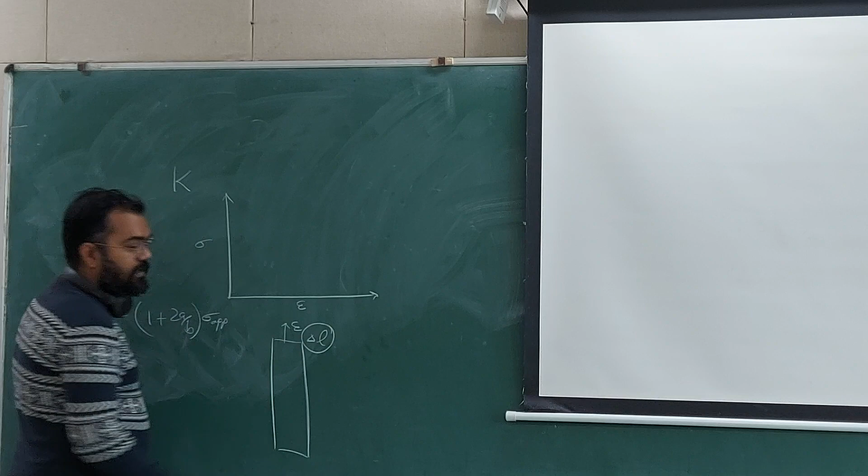I am only applying strain and I am not applying stress. Can I do that? ऐसा कोई strain apply कर सकते हैं जिसमें stress apply ही नहीं करना पड़े? हाँ? कर सकते हैं. How will you apply strain? I have a piece of object and then I'm saying that I'm applying strain and not stress. So that means I'm creating some amount of delta L. In order to do that, I need some force, no?

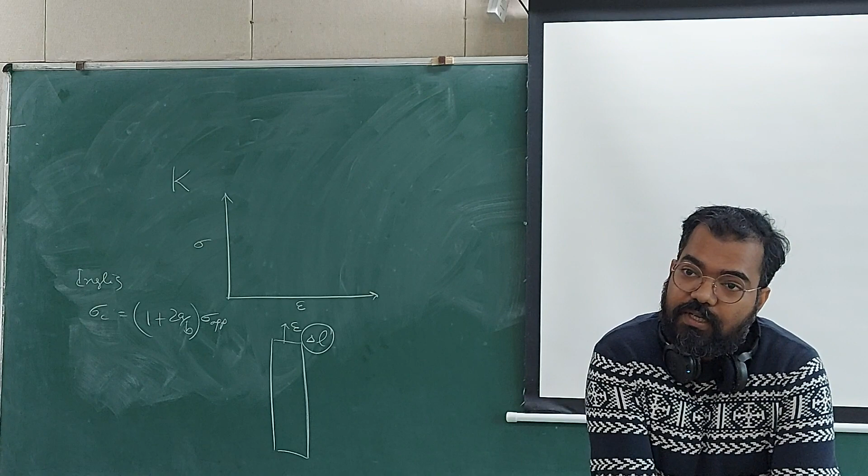So molecules will expand, but they will not. Molecules will expand. मतलब कौन सा molecule? Spacing. Intermolecular spacing. Yes sir. Talk in terms of metallic materials, if you can. ठीक है, polymer में ऐसा हो सकता है. Polymer में बहुत कुछ हो सकता है. Metallic materials में, what is the molecule? In steel, what molecule you have? Which molecule do you have in steel? Grains. Grains are molecules.

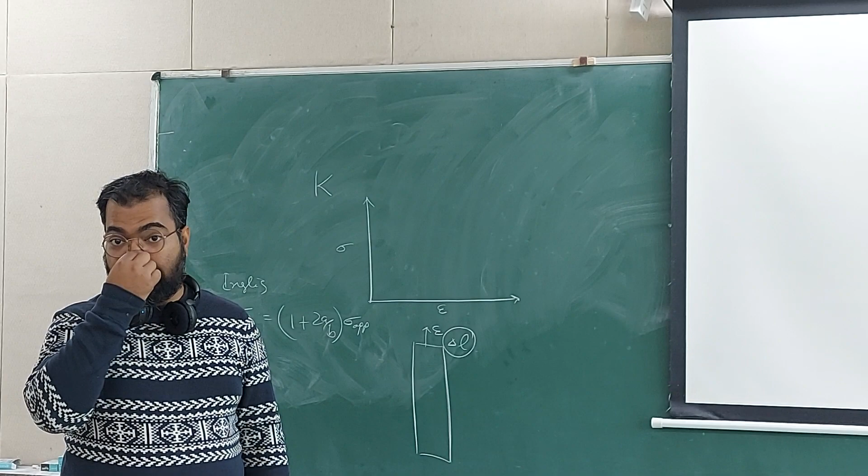Clear, na? There are other arguments. For moving dislocation, you need stress. Peierls-Nabarro stress is needed. You have no stress, so it can't move. So when you think that I'm applying strain, we don't call it strain applied or stress applied test. We call it displacement controlled or force controlled tests. There are two types of tests which you can do. One is displacement controlled and another is force controlled.

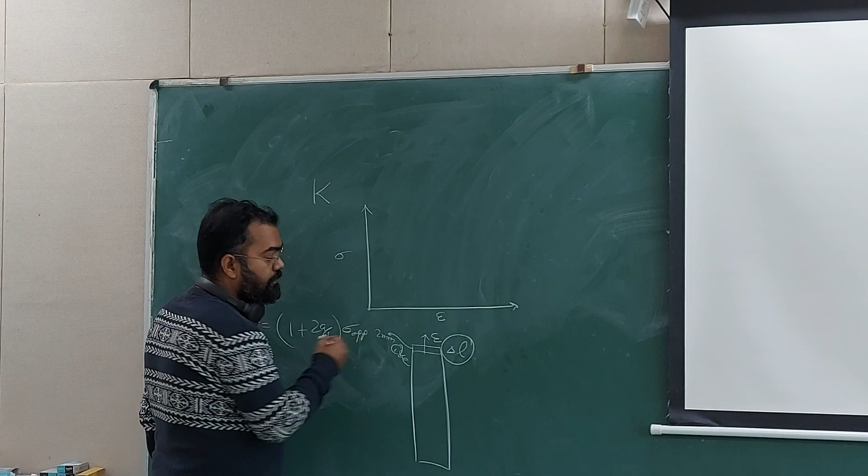You can't just apply displacement without application of force and vice versa. Thermal is one example, but there is nothing happening there. So displacement controlled means you control that within a second you are only going to stretch 2 millimeters. When you are doing force control, you say I will apply 20 megapascal in 1 second. You can't stop strain there, or stress in the other scenario. So we have come back to the very basics.

If this is understood, then in a tensile test we get this kind of curve. We don't really get this; we get force and displacement, convert that to stress and strain. Why are we doing this? After 10 lectures I'm asking, why do we do a tensile test? Young's modulus के लिए tensile test नहीं करता है. So let us talk about this. Now it is becoming a tutorial session. You should do a tensile test. Have you done it? You must do.

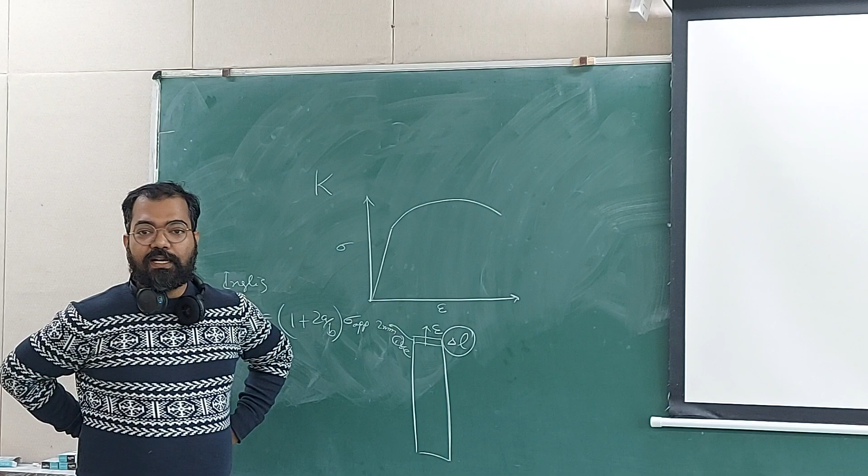Haan, so you watched it, no? Or did you do it? So you put it in the machine and started the machine and you just watched it, witnessed it. So you should do it again. Hopefully our UTM will work by the end of this month. If that happens, then we should do it. Okay.

So whatever test we do, conventional tests for which standards have been made. Okay, so experiment and test, these are two different things. The word experiment can be used in English literature also. Like, why are you experimenting with this? If I give you a sophisticated thing and you are just tinkering with it, then I might tell you, why are you experimenting with this? What does that mean? You're not really doing any standard test.

Experimentation means you are trying something out. Results are not definite. Results are also not defined. You are also not sure of the method which you want to apply. You might have some idea what you want to measure or what you want to see. Sometimes you might not have. For example, you just take a piece of metal and look at it under a transmission electron microscope. You really have no idea what you want to do. You are just looking at it. So you are experimenting with it, playing with it, tinkering with it.

Right? So when Schrödinger designed an experiment to prove whether quantum really exists or not, that example of Schrödinger's cat, which is dead or alive inside a box, that is an example of experimentation. Experiment also to disprove whether ether exists in the universe. There was an idea that there is a fluid in the universe and all the planets and celestial bodies are floating in it, and that fluid was ether. So somebody said there is no ether, there is nothing there.

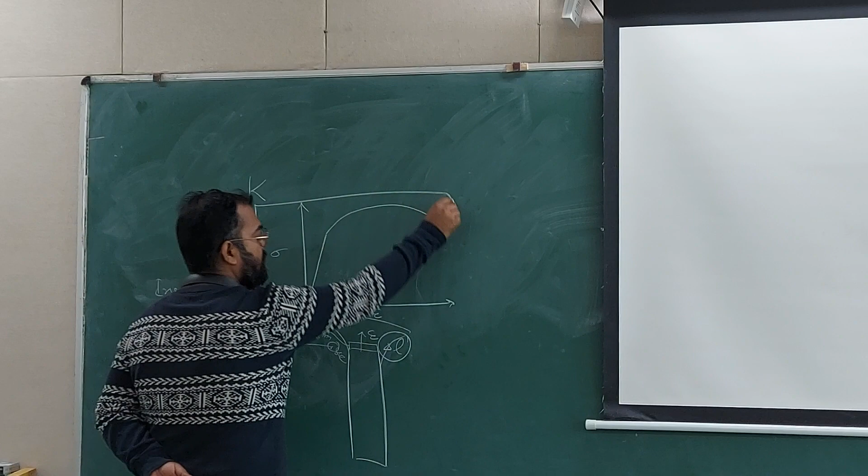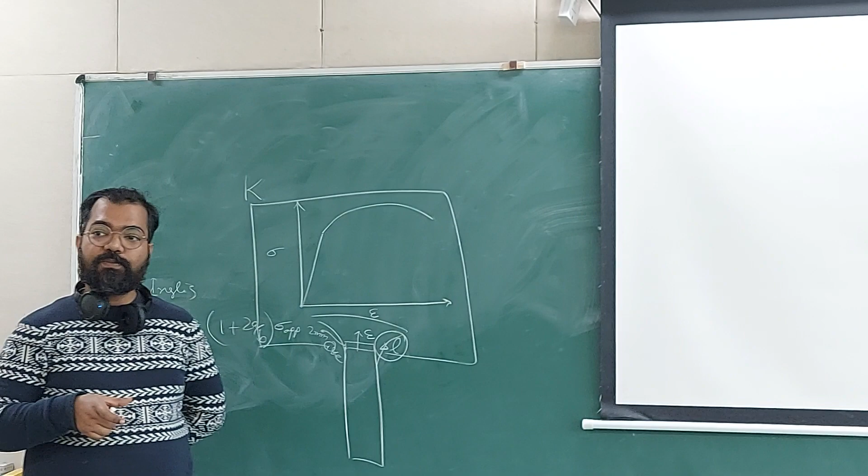If you don't use an extensometer, you are getting the displacement from the machine; force anyways you will be getting from the load cell only. But displacement you can measure from the actuator of the machine. So there is a grip, and that grip is being pulled by the UTM machine, and the UTM knows how much its frame is moving. That is called crosshead speed, and from crosshead speed into time you get the displacement, and that displacement is given to you by the machine.

So if you use that displacement to calculate strain, you will not get the Young's modulus correctly. Why? Because the upper portion will also deform, and the machine will give the reading along with the whole specimen. But we are taking the reading of only the gauge length, so we need to provide an extensometer. So the total strain which you are getting is the strain in the specimen and the strain in the grips and fixtures.

The UTM overall fixture really doesn't matter that much; the grips matter, because the dimensions of the grips are smaller in comparison to the machine. So if you are applying 200 megapascals, that same amount of force, not stress, is also applied on the fixtures, right? Fixtures are also under the tension load. And why do we have this dumbbell shape of tensile specimen?

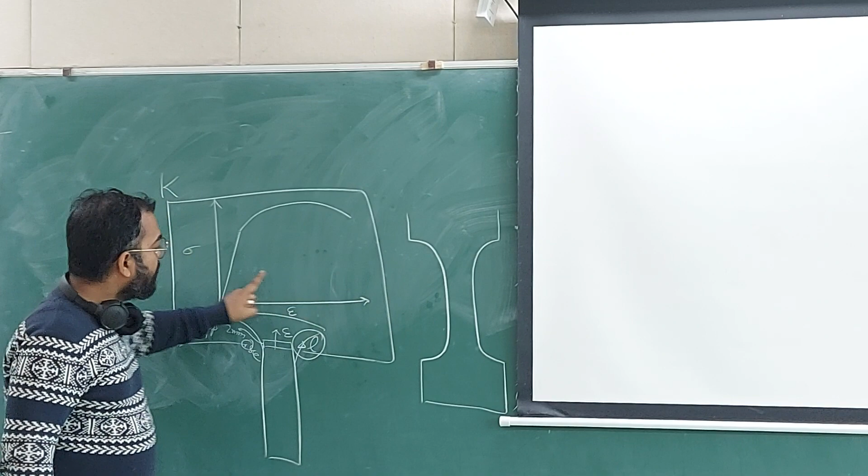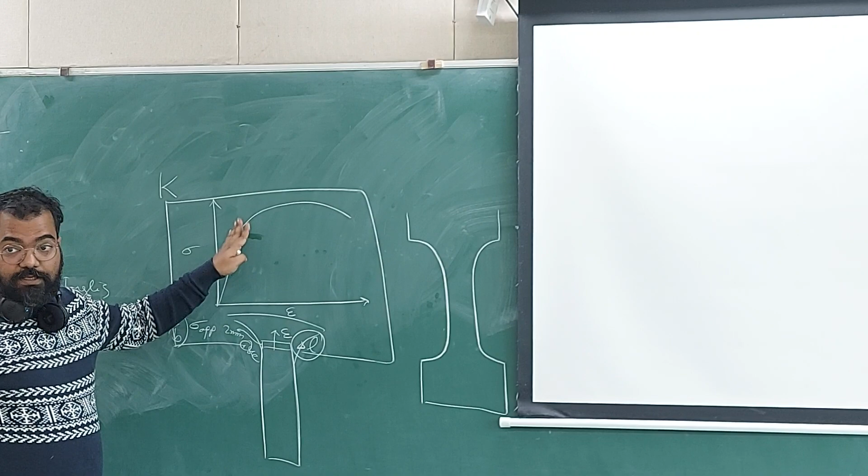Because the diameter of the sample is smallest in the whole assembly, the stresses will always be higher, so they will always be ahead in their stress-strain diagram. The elastic region will come earlier in them, plasticity will begin earlier, damage will begin earlier, and they will fail earlier than adapters and other things. If your adapter has a stress-strain equal to this, that should be the worst condition. You can have a worse condition, that you have even softer adapters with a stress-strain profile something like this.

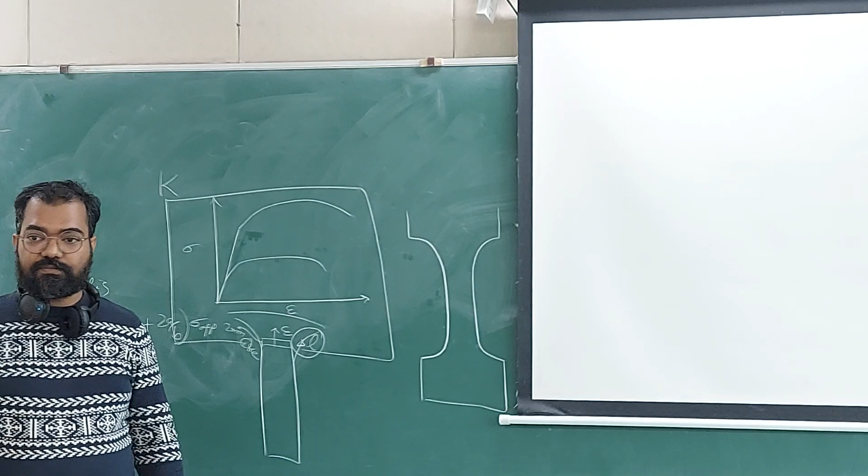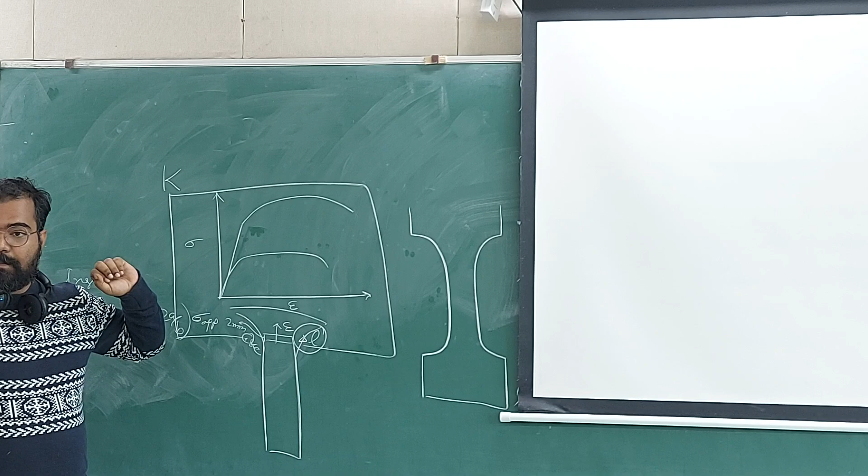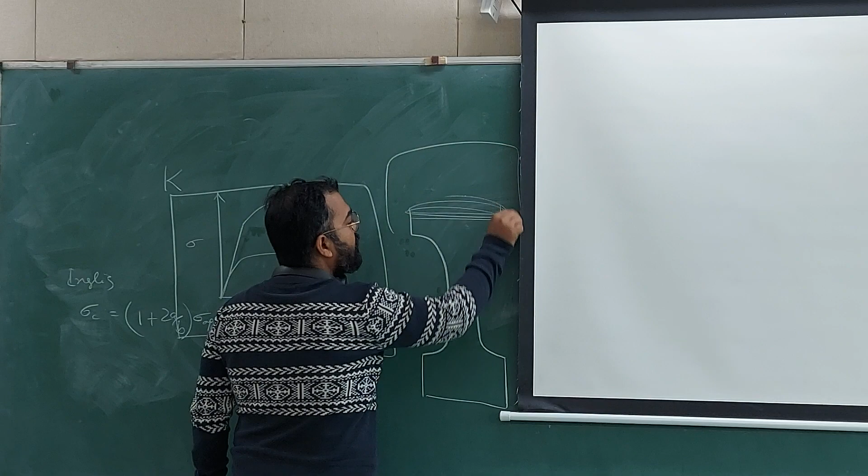So the worst condition could be that you are making an adapter of the same material as the tensile specimen. Even then, the sample will break first and the fixture will not break first, because this part goes into the fixture, and the fixture's diameter is going to be larger than this, so the stresses are going to be less in the adapter, in the fixture.

But all of them will be elastically deforming. Once it breaks, they will recover, so fixtures are good to go for the next time also. But during the test they have deformed elastically, right? So the strain which you are getting from the machine also includes the strain coming from the elastic deformation in the grips and fixtures.

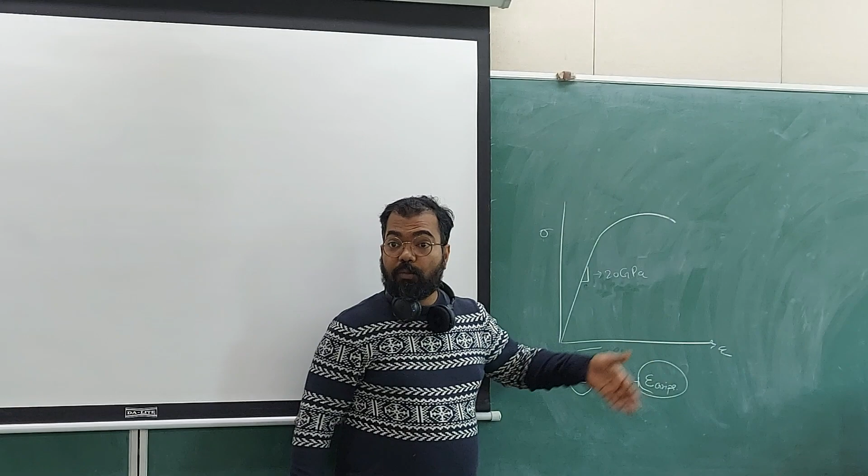That's why it is wrong. Because you have larger strain in comparison to what you should have, the material deformation is showing more strain than it should. So the material looks a little softer on the curve, not really it is, because you are getting this extra strain from the machine. So your Young's modulus will go down, your slope will go down. This is called machine compliance. You should read about this.

And how do you remove the effect of machine compliance? If you use an extensometer, an extensometer is an instrument which sticks to the sample, and you should remove it as soon as the curve changes its slope. As soon as you are in the plastic region, you should remove it for the safety of the instrument, because then necking will happen. After some time, necking will happen. You don't know how much time it will take for necking, so you should remove the extensometer.

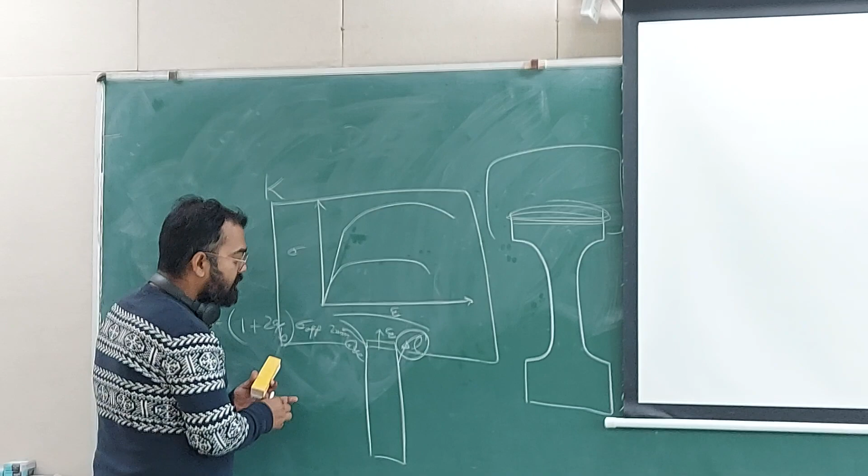And the extensometer is valid only for the elastic region, because once it deforms locally, you have necking, then the extensometer might not be in that area, so you will be measuring the strain somewhere else. As long as the strain is uniform everywhere, which is in the elastic region, the extensometer is just measuring how much change in diameter is happening.

Okay, so if the diameter is going down, then the two tentacles of the extensometer will come closer. This will give a change in the resistance, and the change in resistance will be calculated via a Wheatstone bridge, where you have an unknown resistance and 3 known resistances. That signal will be converted back to strain, which you will be getting in your machine.

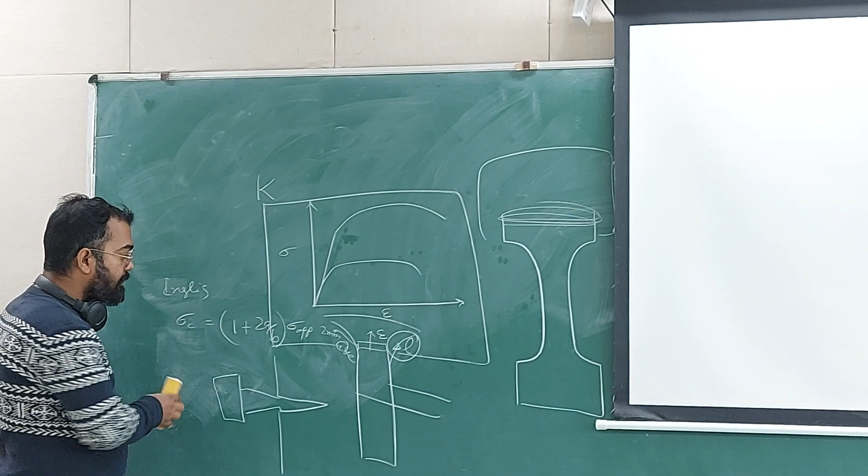So coming back to the same question, tensile test we do to measure yield strength and all those things. Okay, so now let me ask another question. Why are we interested in finding out yield strength? Why do we want to know what is the yield strength of a material? To avoid material failures.

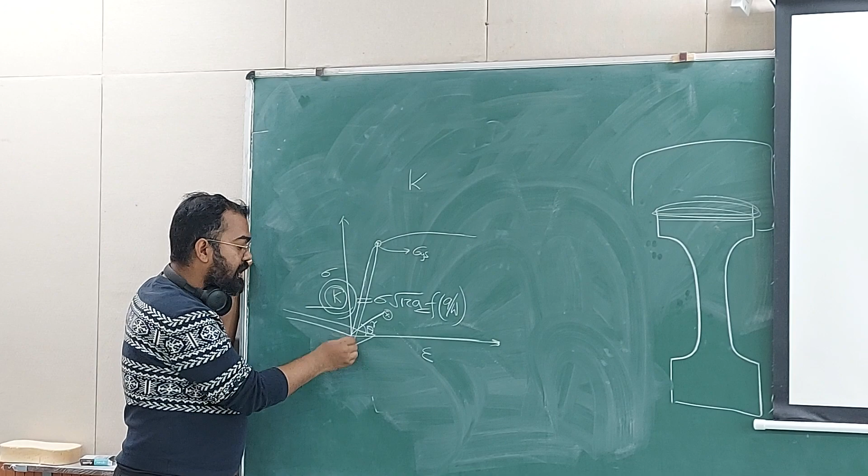Is it okay? So when you increase stress, then K is also going to increase. A can also increase. With increase in stress, crack can start propagating, right? And that will be compensated in stress intensity factor. Of course, you will have f of A by W, but once you know A, then the K will also be known, right? So after a point of critical K, if you begin with a crack length of A, you are now loading, and again in this kind of testing you get force versus displacement. Okay, and from this force versus displacement you have to calculate the value of stress intensity factor.

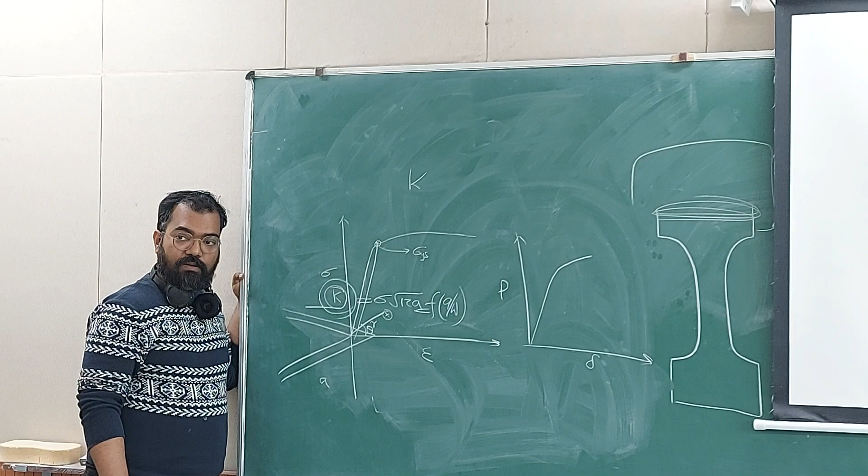Okay, so with this increment you can also plot K, which is increasing with delta, and beyond a value of K, crack starts propagating. If you are having a stress condition or crack condition so that the K is smaller than that critical value, then crack will not propagate in that material. Okay, so if I take a AISI 4340 steel, mild steel, titanium alloy, for each of them this critical value is going to be different. If you cross this value, crack will propagate and you can't stop it. And if you are lower than this value, crack will not propagate. Okay, so this can help in design criteria.

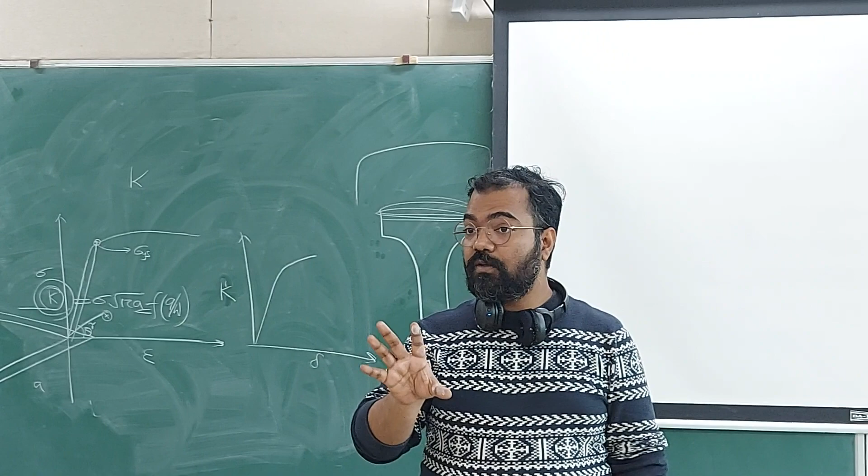How? So from manufacturing, if you make a component, we know by doing ultrasonic testing what is the maximum size of the defect I have, right? What are the cracks which have been created during the manufacturing process, for example, because of shrinking in ingot casting. Okay, so I know the worst condition, that this is the maximum size of crack I have. For that I can calculate what will be the stress intensity factor for worst condition. And what is the worst condition?

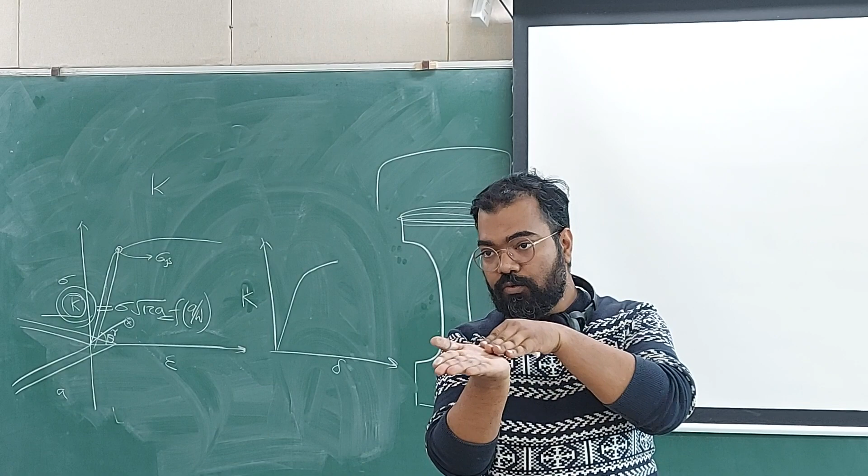Mode 1. Mode 1 will give you highest value of stress intensity for the same amount of stress if you load a specimen in mode 1, in mode 2 or in mode 3. If you apply same amount of stress, K will be maximum in mode 1. Okay, so if you are good for worst case, then obviously you are good for the other better cases, right? So this is why you do testing in mode 1 unless you are really interested to understand what is happening in different modes. Just for design sake, people do mode 1 fracture toughness testing.

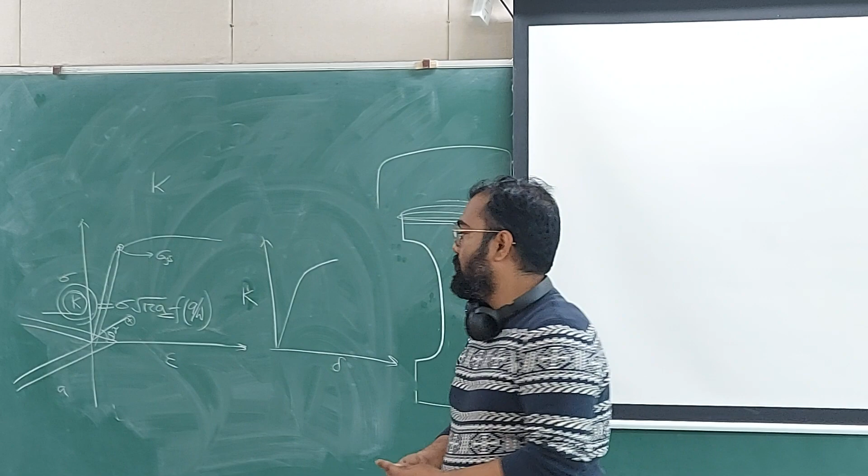Okay? So when you do mode 1 testing, you are slowly increasing the value of stresses, and thereby you are increasing the value of stress intensity factor for the known amount of crack. Or you can know from the test that for, let's say, titanium alloy, some alloy, you are getting a critical value Kc, or K1c I will call it, because I am doing the test in mode 1. If I just write Kc, I do not know in which mode the test was done. Okay, so this is written in Roman because all these studies started from, not from Rome, from physicists.

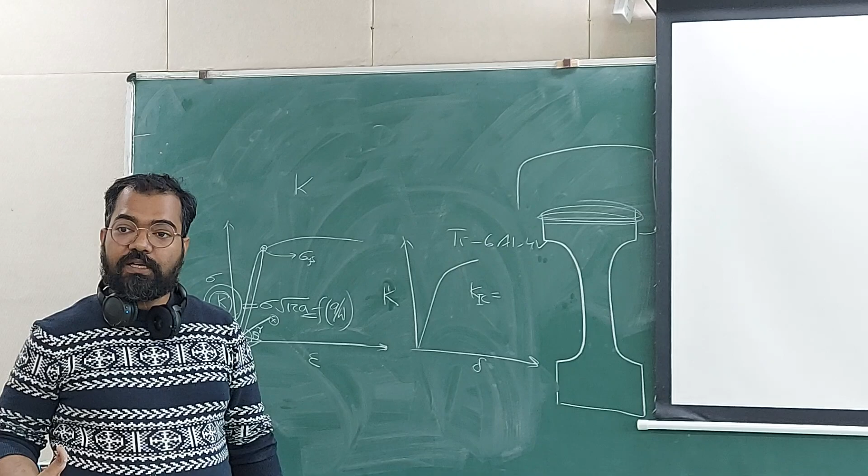Okay, and you will see the earlier studies, they use a lot of temperature. So when they use temperature in calculation, you will see the unit to be Kelvin. So physicists, their favorite unit is Kelvin for temperature. But then when fracture mechanics came to engineers, then it changed to degrees Celsius, and this unit conversion usually goes on. I don't know how politically influenced this is, but it changes once in a blue moon.

So why was I discussing units? Temperature. Fracture toughness. Fracture? Kelvin. Okay, so I have forgotten.

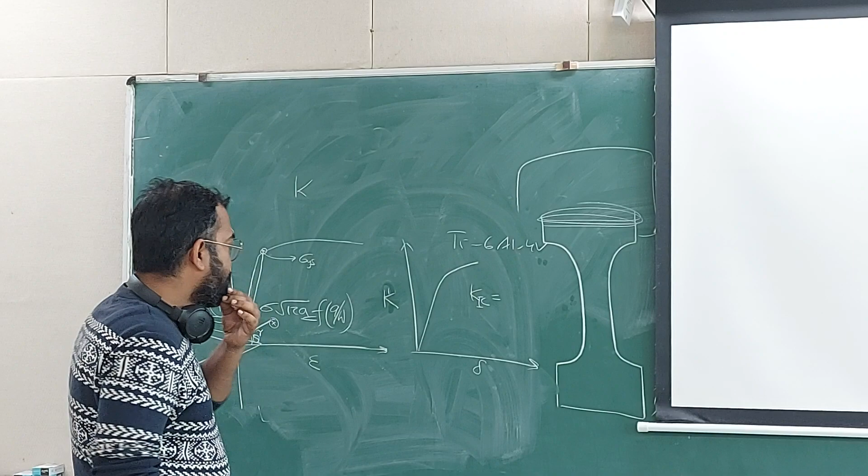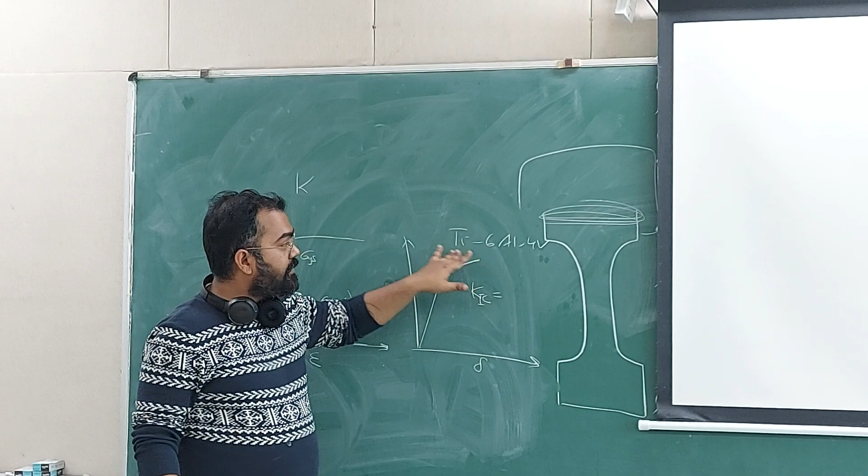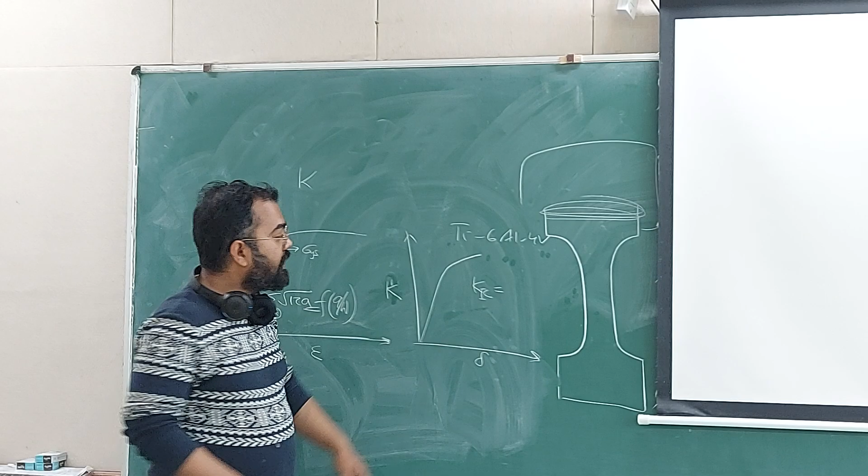K1c. So mode 1 is the worst condition, and in that condition, for a crack length, if you are doing this for this alloy, you do the testing and you can find out when the crack started propagating, and that value is K1c. Okay, so if I have K1c, somebody has done the test and told me that this is the value of K1c. So let us say 180 MPa root meter. Okay, MPa root meter is the unit of K1c.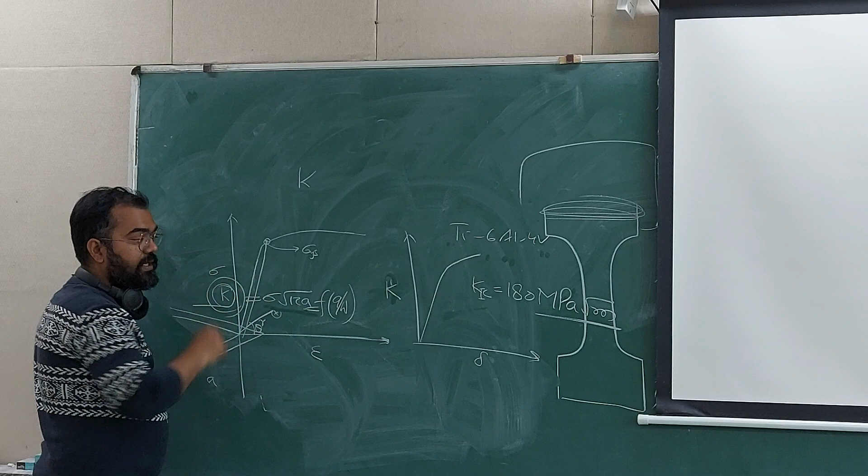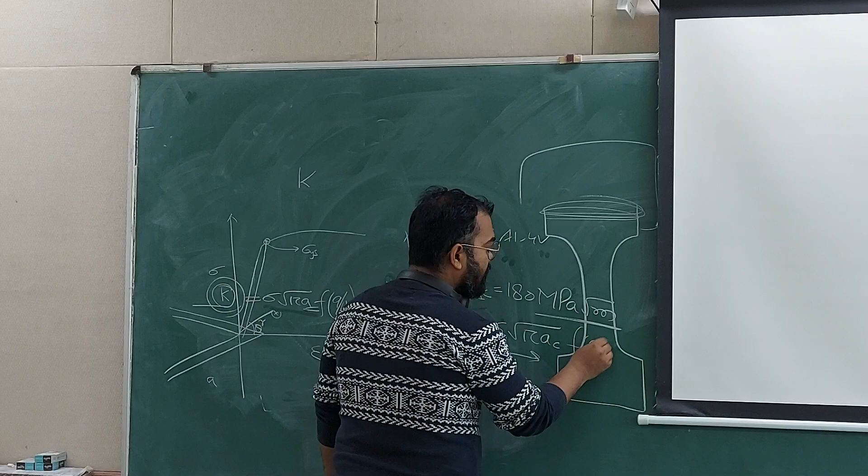Okay, so if this is the value of K1c, I can find out how large of a crack I can accommodate in my component. So from this I know that this must be equal to sigma root over pi AC. That's the value of critical crack I can have in my system. And if I have a pressure vessel which is internally loaded by pressure, then if I take a small element on the outer radius of the material, and suppose I have a crack like this, I can imagine that this is going to expand, this is going to bend because of pressure, a small element of that.

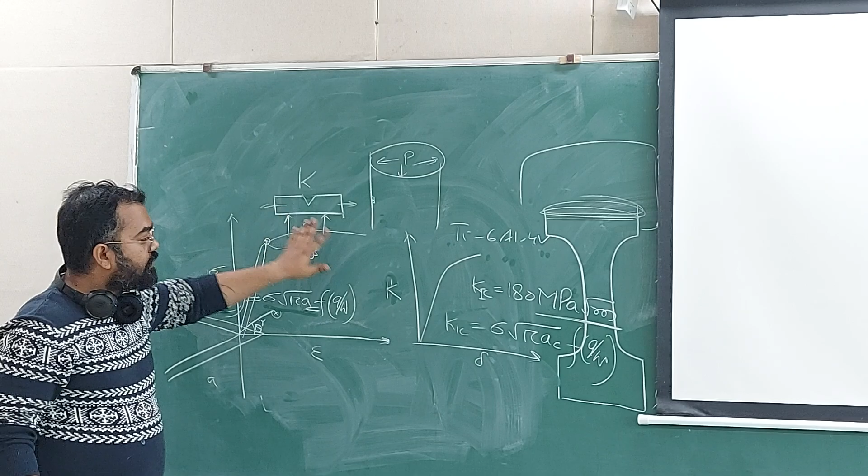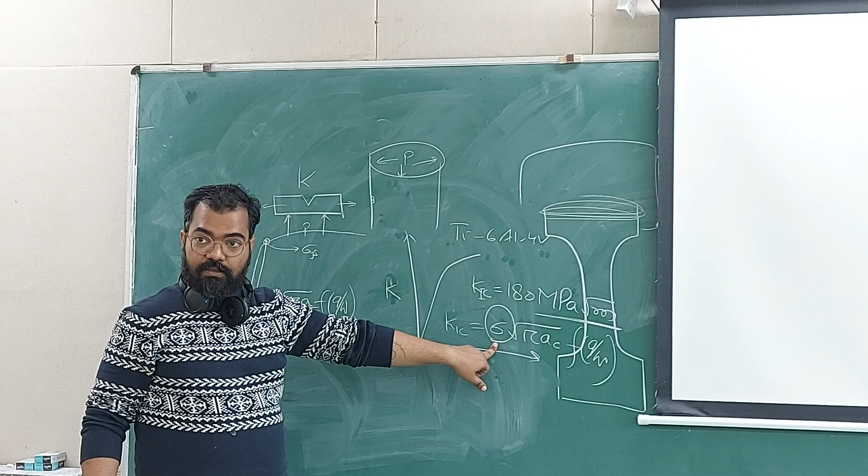Okay, so this is going to be in mode 1. Even if it is not, the crack can be a little tilted, but the worst condition will be mode 1, right? So that takes care of the factor of safety there. So from this I can calculate; f of a by w I know for mode 1. And then I should know how much hoop stress is there in that pressure vessel. From that I know my operational stress condition. So I plug that factor there, I know this value, I know that value, pi everyone knows, so I can calculate AC. And suppose AC comes out to be 5 millimeter.

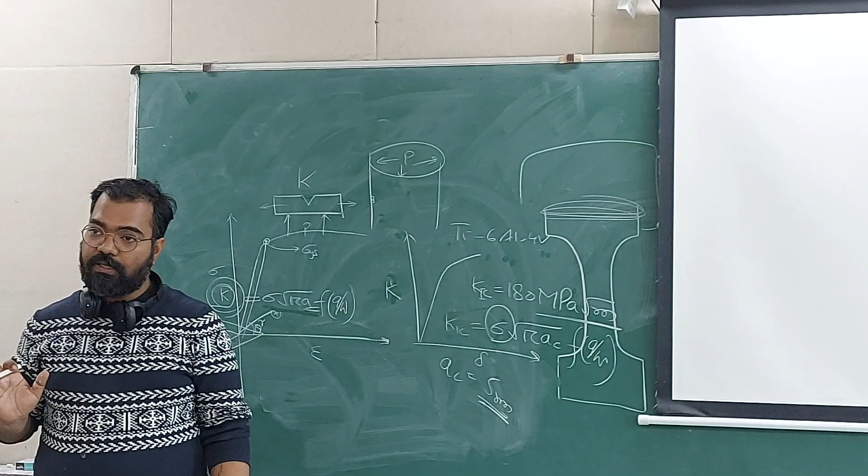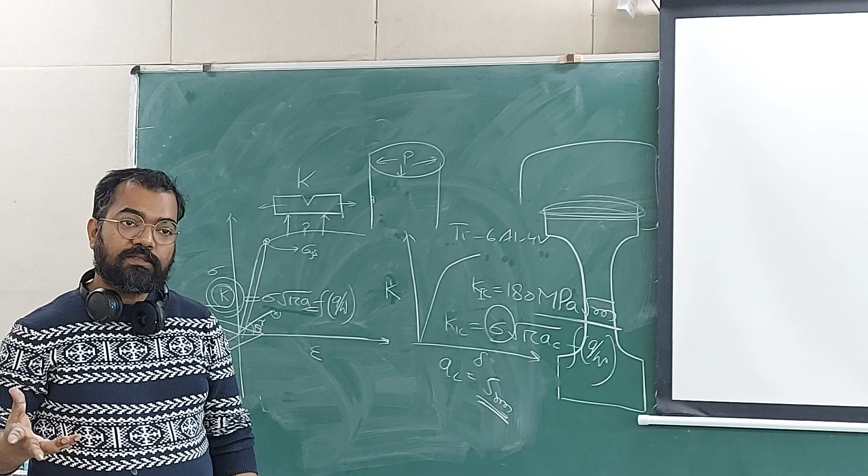So then I know that no crack in my system should be larger than 5 millimeter. And then I do ultrasonic and see that the maximum crack I am getting is 3 millimeter. Then I will take that plate or sheet or whatever it is, and if it is 6 millimeter, 5.5 millimeter, I will not take it. I will reject. Understood the importance of K1c? Yeah. So this K1c appears to be a material property, at least a design criterion for sure. But there is a size effect. And before we go into that size effect, well, now we are talking about it, so I'll finish it.

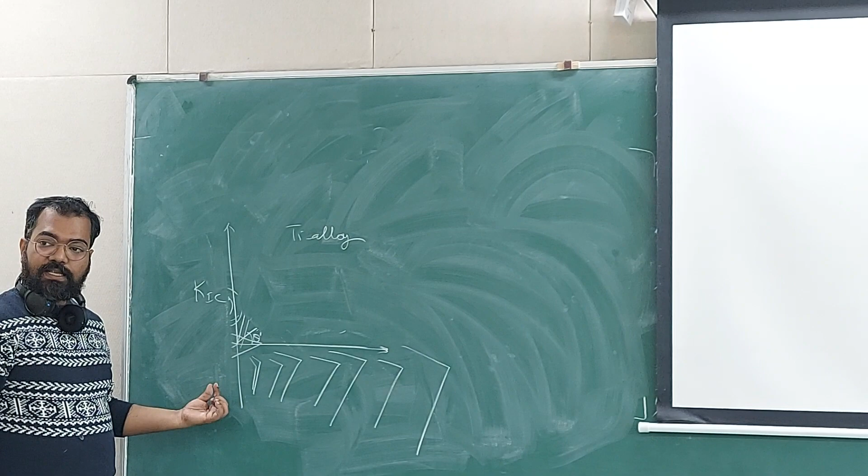So if you calculate K1c for the same alloy, let us take titanium alloy, and I do the testing for a very thin sample, and I keep on increasing the thickness of the sample, from a very thin sample to a very thick sample. So what am I changing? Plane stress to plane strain. And if I plot it, then the initial region is unknown, and then it shows this kind of profile. It is not K, it is K1c. So for different thickness values, you have done the fracture toughness testing and found the critical K value for which the crack starts propagating. That value you are plotting. Do you understand? No?

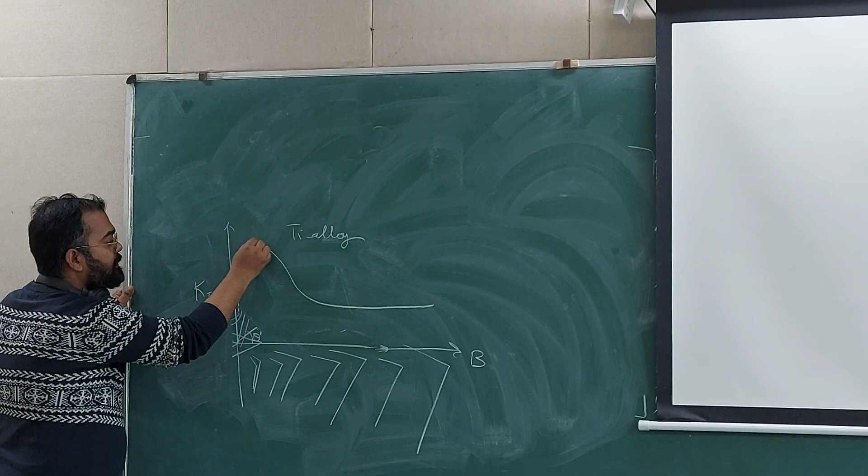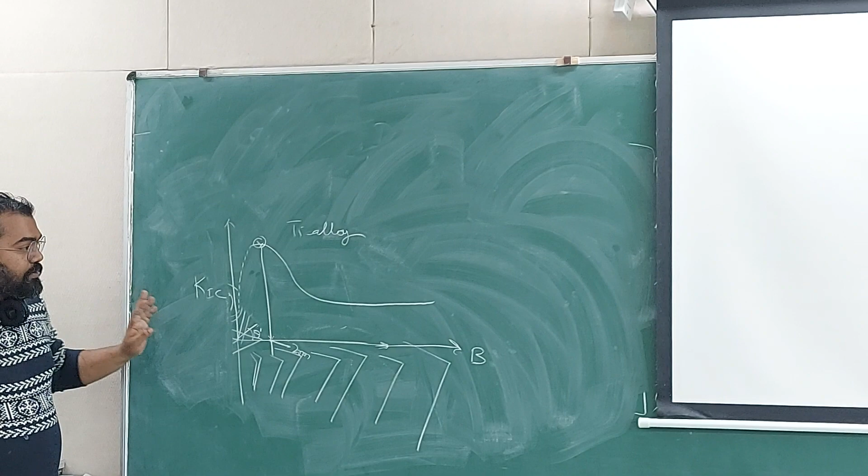So let us take this point. This point would mean 2 millimeter. What is my x-axis? My x-axis is thickness of the specimen. Okay. So when I tested a specimen which had a thickness of 2 millimeters; so far in our derivation we have not looked in the third dimension, the thickness direction, right? So my specimen thickness was 2 millimeter, and all other dimensions will scale according to thickness and crack length as per standard. So usually you use this kind of specimen. I'll discuss in detail later how to do the test.

So this is known as the width of the specimen, which is usually 2 times the thickness of the specimen, and this is the crack tip, and this distance is called the crack length of the specimen, not from here, from there. Why? Because that will be aligned in the testing machine. So you will have pins here, and these pins will be connected with the machine, and the machine will be pulling this pin up, and this pin will remain fixed.

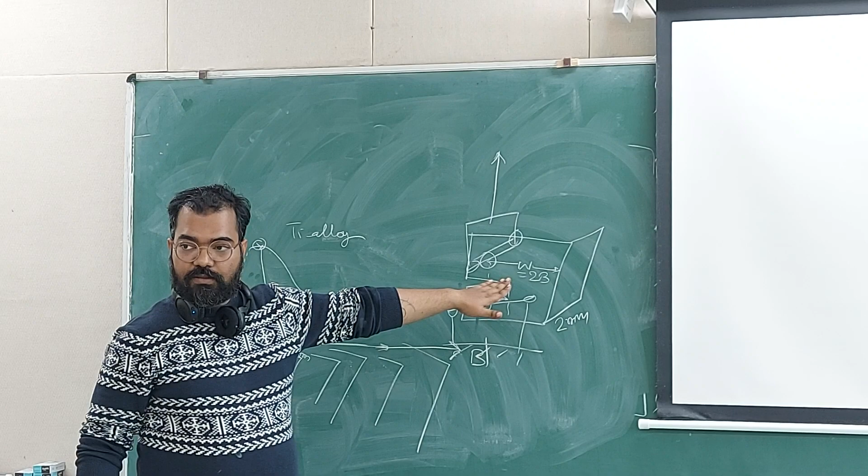Okay, so it is like a tension test, only with pins. Instead you have a plate which has a crack in it. Okay, so this is the kind of specimen which you test. Other kinds of specimens are also there. This is called a compact tension specimen. So if you change the thickness, other dimensions will also change, so that it becomes geometry independent.

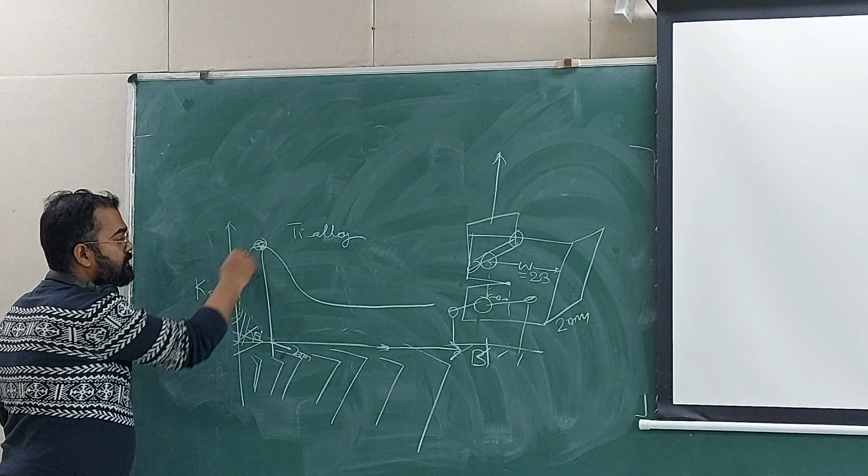Okay. So if I test a specimen of 2 millimeter and I find out what is the critical value of K beyond which the crack starts propagating, that value is this. Do you understand now? Really?

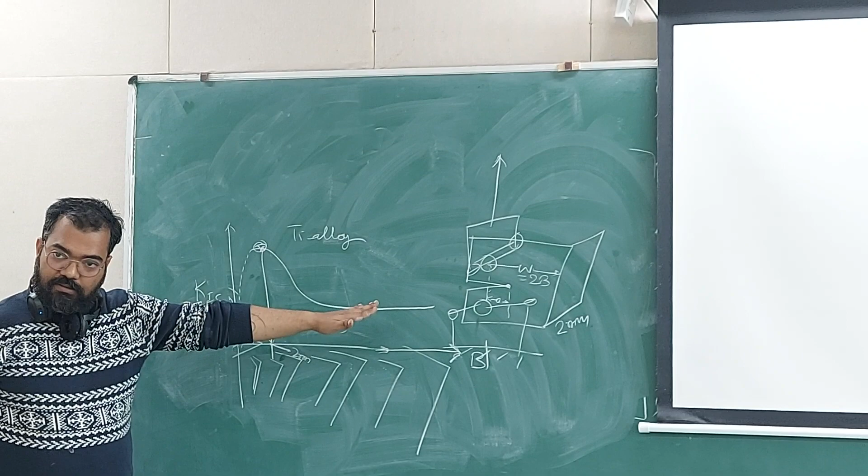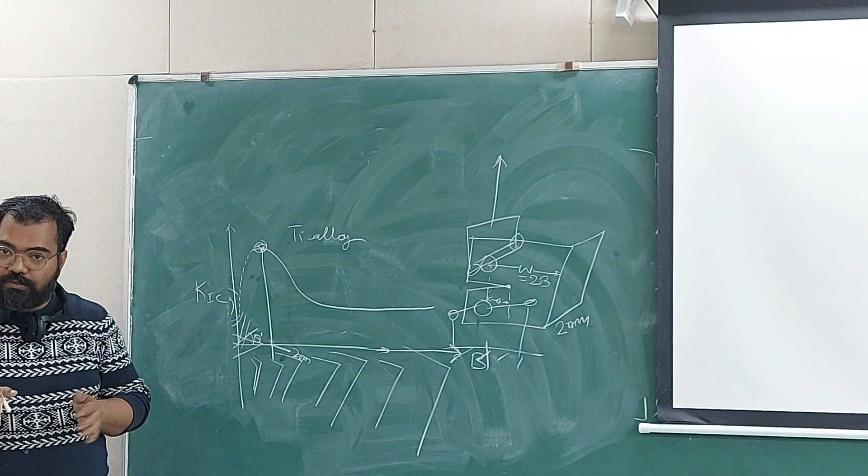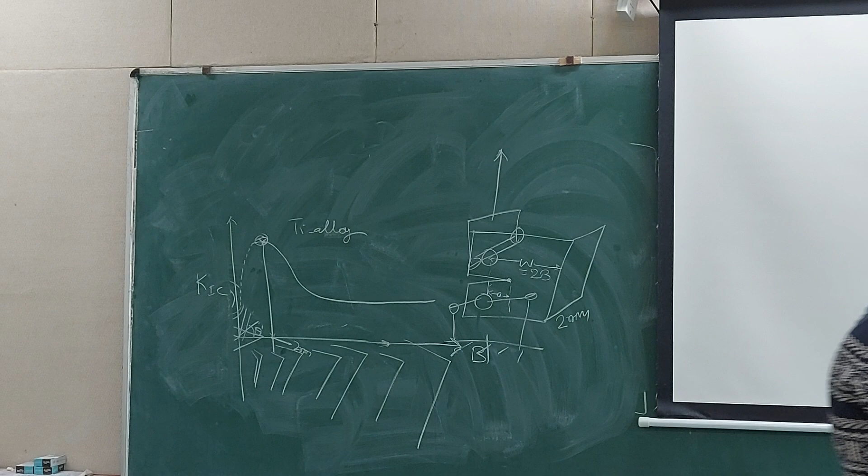Okay? So I told you in plane stress the plastic zone is more. If the thickness of the specimen is less, it is near to a plane stress condition. And I will come to that and will prove to you that in plane stress the plastic zone is larger. Okay, I don't have time today. I wanted to do that. I will do that without explaining what it is, and that I'll explain in the next class. But because now you have asked me, let me show it to you.

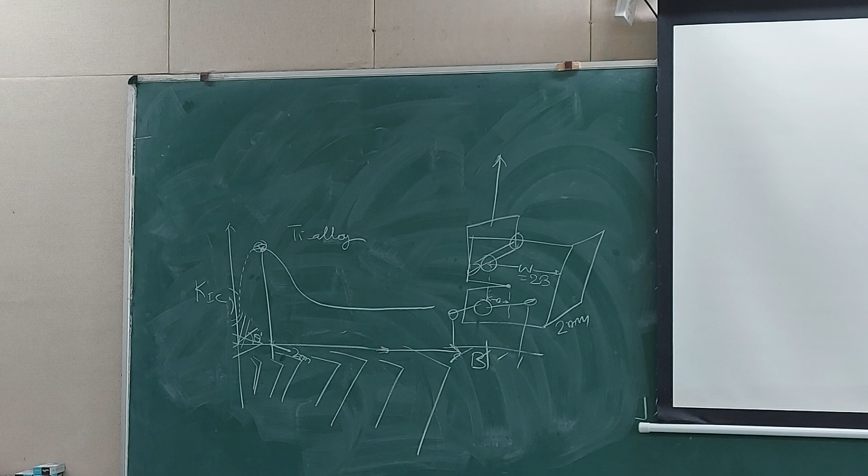Where is its wire? Is the projector on? Honest. Then. So do you see? Yeah.

You see. Okay. So forget about this curve, that we'll discuss later. So von Mises criterion is sigma 1 minus sigma 2 whole square and summation of all other principal stress differences squared, right? Square root of that. If it is a uniaxial condition and sigma 1 is giving you sigma yy, which is a principal stress, then sigma 2 will become 0, sigma 3 will become 0. So what will you have? 2 sigma 1 square will be equal to 2 sigma ys square, so sigma 1 is equal to sigma ys. Right?

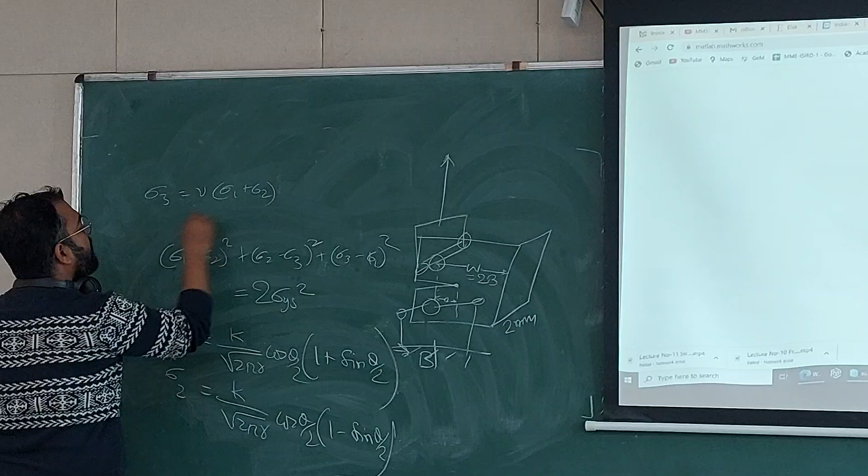So this is von Mises, okay? And sigma 1, sigma 2 from our Irwin's derivation is K by root 2 pi r cos theta by 2 into 1 plus sine theta by 2, and K by root 2 pi r cos theta by 2 into 1 minus sine theta by 2. And if it is plane strain condition, then sigma 3 will be nu into sigma 1 plus sigma 2. And if it is plane stress, then this will be 0. Understood? Now you plug the values of this in this equation. So you will have a function of r and theta equal to sigma ys.

Sigma 1 is being replaced by a function of r and theta, sigma 2 by r and theta, sigma 3 by r, theta and nu. So on the left hand side you have something with r and theta, and on the right hand side a constant material property telling you that plasticity has begun. So you find the value of r for which plasticity has begun, so you can calculate Rp, the plastic zone. If you assume plane strain, you will use this and put it here. If you assume plane stress, you will not use this and you will have a different expression, right?

And by doing that... there's no internet. So, you have to do this. You have to calculate the value of R by plugging these things in. This is a personal assignment to you. Okay? And all of you have to write a code on this. Okay? You don't really need to write a code. You can do it in Excel also.

Do you see here? Some arbitrary value of K and sigma y, and then theta varies from 0 to 360, and you calculate the plastic zone radius for the plane stress condition and for the plane strain condition, and then you plot it. And the red one, you might not believe me, so that's why I'm showing you.

So you see x and r. r here is for plane strain, and rps is r for plane stress. You'll get two different expressions because sigma 3 will be different. So r for plane strain is plotted with a dashed line. That is the dashed line, and this is the tip of the crack.

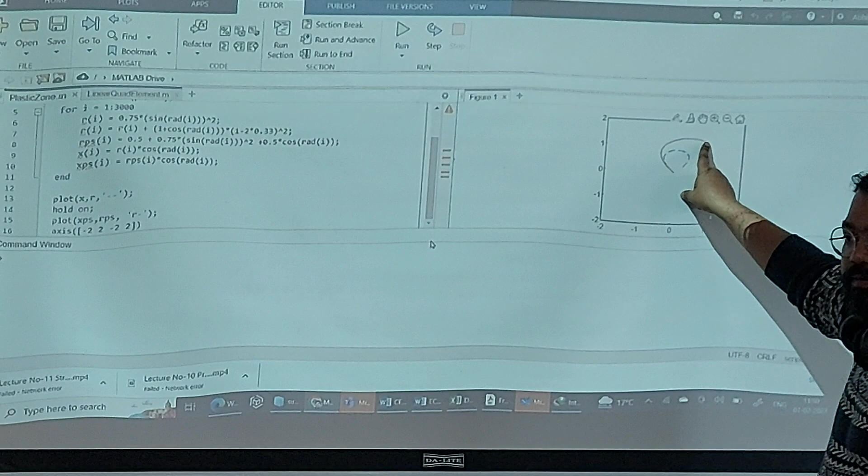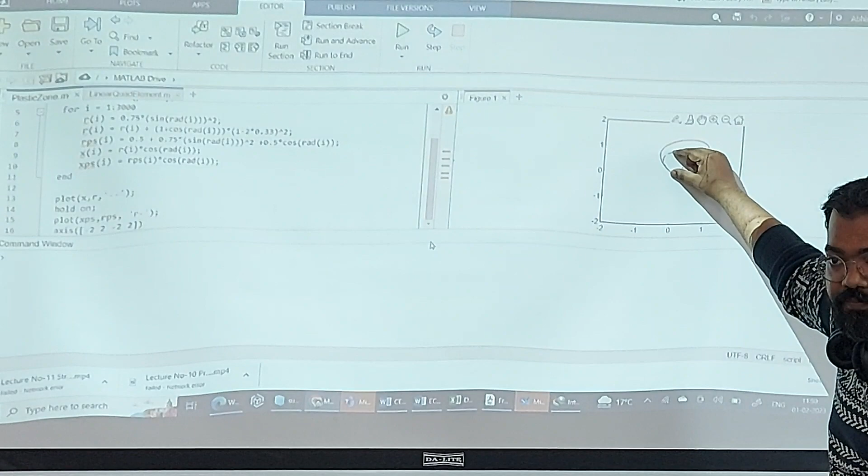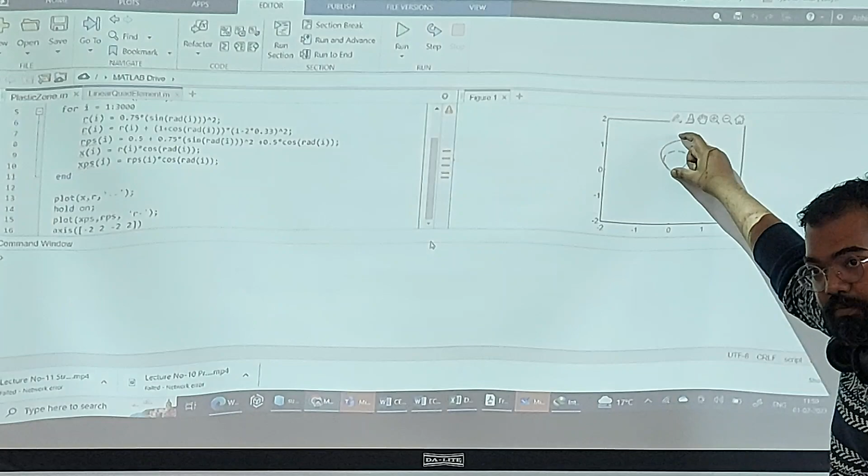Right? So this is the zone of plastic deformation for plane stress, and this is the zone of plastic deformation for plane strain. So for the plane stress condition you have larger plasticity. What does that mean? A softer material. It's the same alloy, but if the thickness is less, it acts softer.

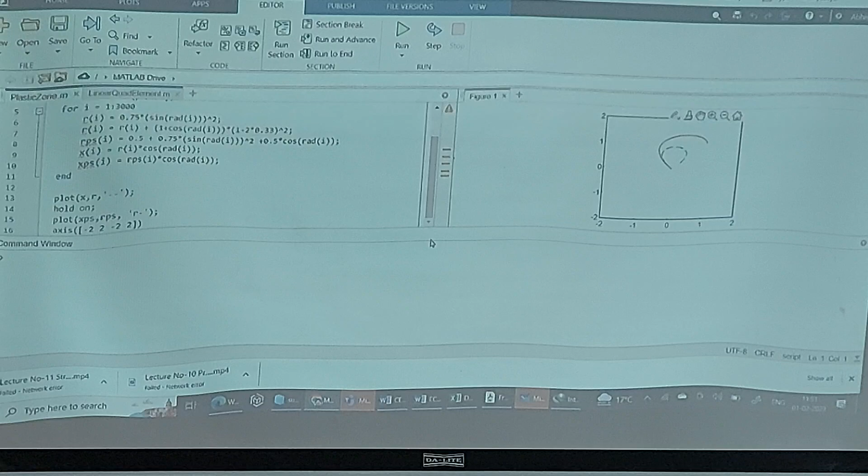No magic is happening, just the calculation. And in that calculation, nowhere have I assumed anything but plane stress and plane strain. What does that mean? Sigma z in one case is 0 and in the other it is not. Sigma z is the stress in the thickness direction. If that stress is not there, the material is free to flow in the thickness direction. If that stress is there, it obstructs that movement, causing constraint.

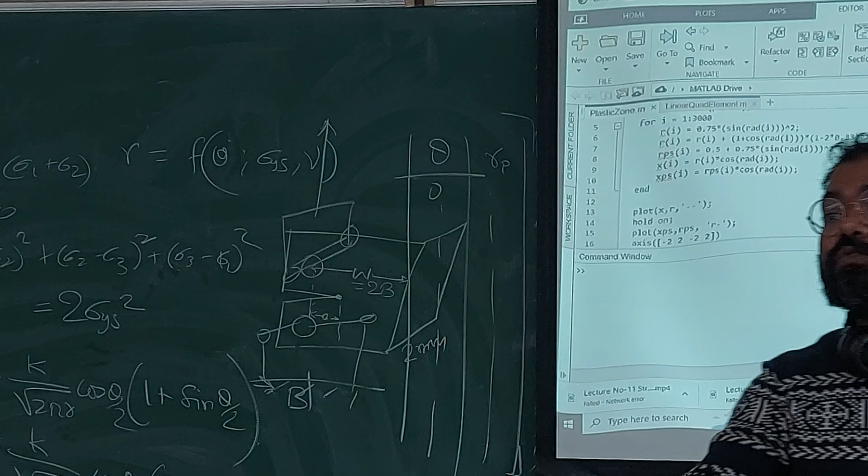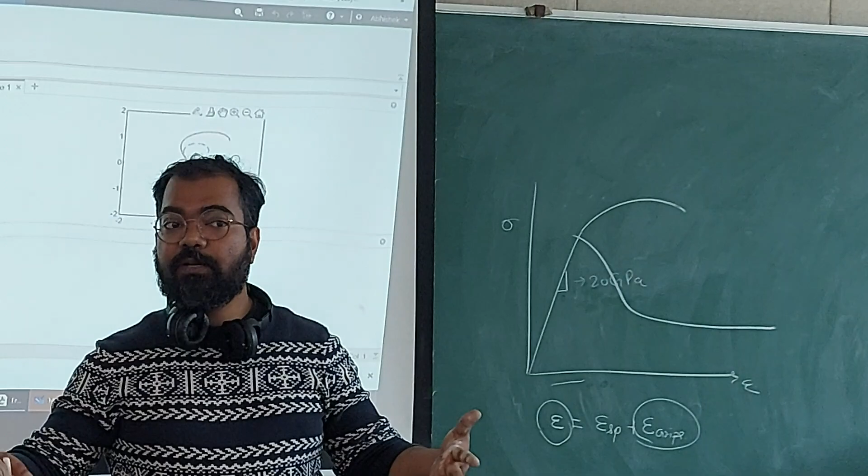Okay, so there is an obstruction in material flow. That's why plastic deformation is not that easy when the sample is thicker, and that's why you get the difference that fracture toughness for a thicker specimen of the same material is smaller, and after a certain thickness it becomes constant, and only in that range is it a material property, because a material property should not change with thickness.

So beyond that plane strain thickness, K1c becomes a material property. The K1c you calculate as a material property must be plane strain fracture toughness. You must ensure the plane strain condition. Under plane stress, it becomes a matter of the individual component. If the lab specimen thickness and the pressure vessel thickness are different, you can't design based on your lab value of K1c if it is not in plane strain condition.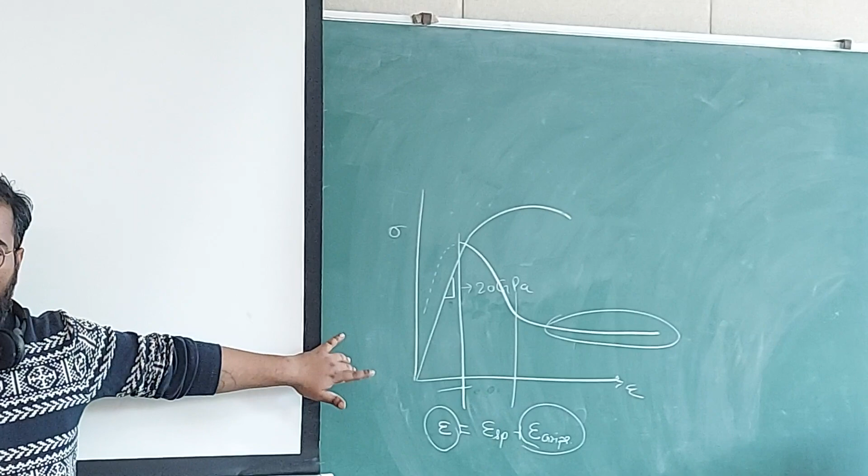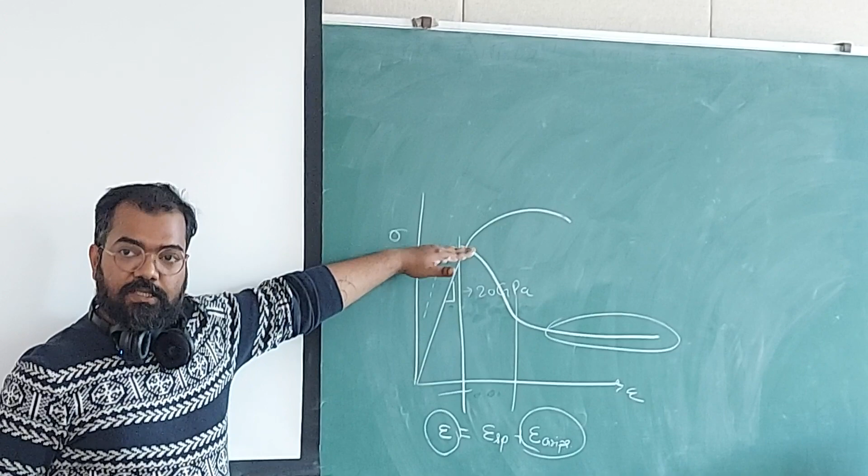Understood? And the last remark: in plane stress condition it increases, but there is a region beyond which, if you decrease the thickness further, people have different opinions and experimental values. Some find a constant value where it doesn't change. Some find decreasing fracture toughness, and those things are not known.

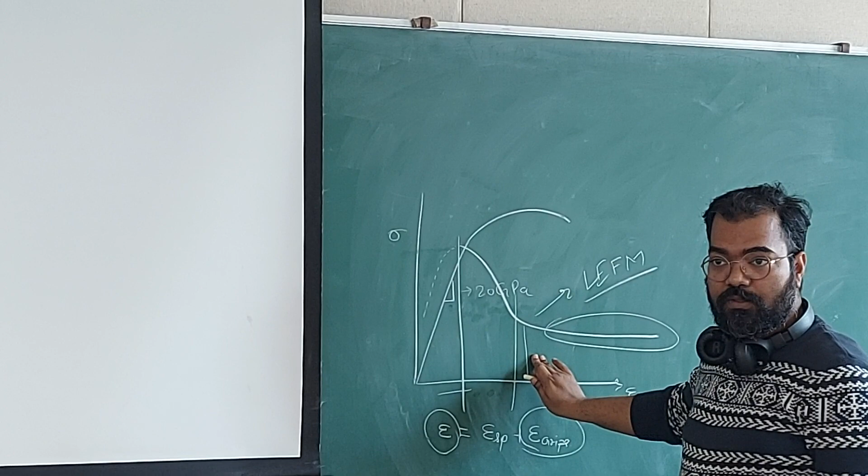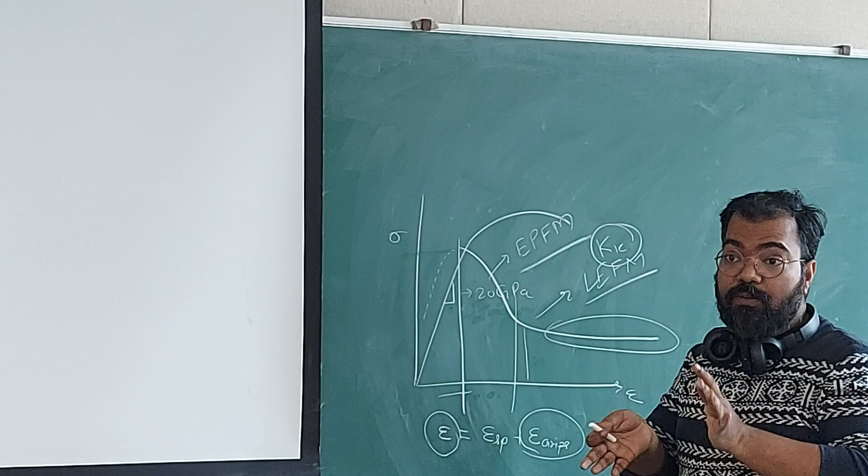This region is LEFM, where the plastic zone is significantly smaller and you can ensure plane strain. In this region it is elastic plastic fracture mechanics, where plasticity is significant, and K1c is not so valid. You can still measure it, but it will be plane stress or somewhere between plane stress and plane strain. And this region is called general yielding fracture mechanics, GYFM, which is the case for thin sheets.